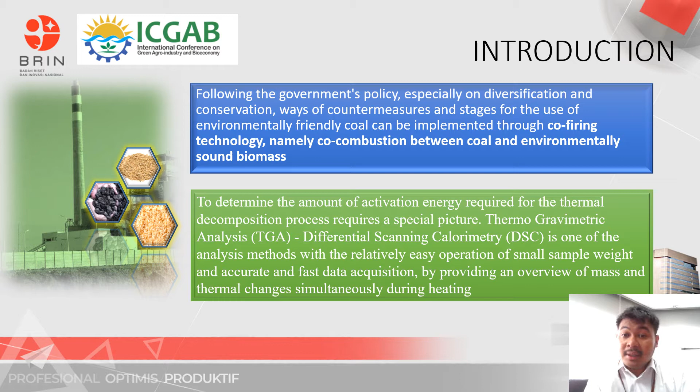So our research methods: the study aims to evaluate the possibility of the utilization of rice husk waste and sawdust for co-firing with coal in the boiler power plant with the capacity of 2 times 50 megawatts and develop recommendations to the government related to the process of utilization of biomass waste for co-firing. We have activities divided into the following stages.

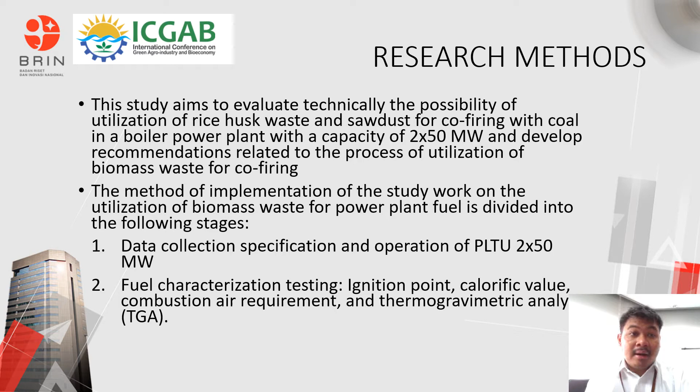First, data collection, specification, and operation of the coal-fired power plant, 2 times 50 megawatts, and second, fuel characterization testing, including ignition point, calorific value, combustion air requirement, and thermogravimetric analysis, or TGA. We conduct various parameters of the TGA profile, which can be obtained from several activities. We evaluate the initial combustion temperature, maximum peak temperature, final combustion temperature, maximum rate of weight loss against time, and also the start and end time of the oxidation reaction between carbon and oxygen.

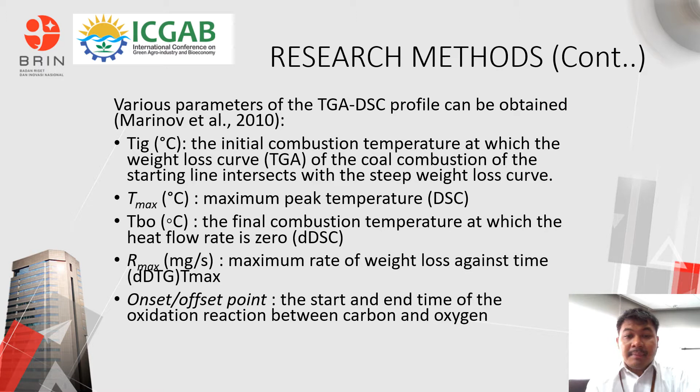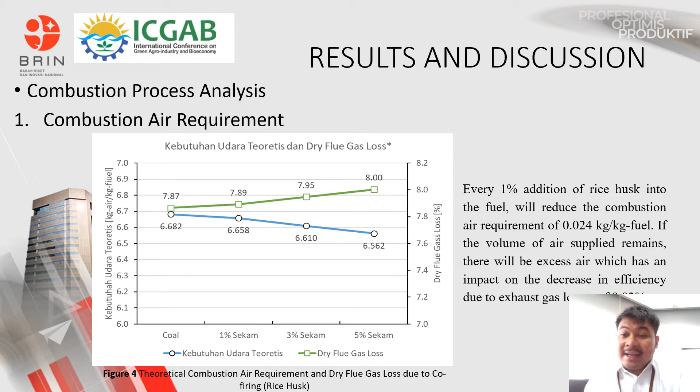As we see from this result and discussion part, for the combustion air requirement, every 1% addition of rice husk into the fuel will reduce the combustion air requirement by 0.024 kilogram per kilogram of fuel. If the volume of the air supply remains, there will be excess air which has an impact on the decrease in efficiency due to the exhaust gas losses.

As we see from the combustion air requirement in figure 6, the addition of 1% sawdust will reduce the need for combustion air by 0.006 kilograms per kilogram fuel for ironwood and 0.009 kilogram per kilogram fuel for teak. The increase in exhaust gas losses that occur when the volume of air supplied is not lowered is equal to 0.01 for every 1% addition of teak sawdust or ironwood sawdust.

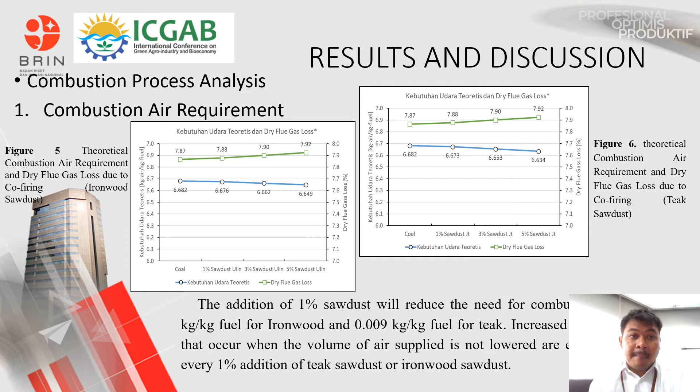Here we have the calorific value analysis from figure 8, figure 9, and figure 10. From the figures, it can be seen that the calorific value drops along with the mixing of biomass into coal. Every 1% mixing of rice husk into coal will reduce the calorific value by 19 kilocalories per kilogram, while mixing sawdust will reduce the heat value by 7.5 kilocalories per kilogram for each addition of 1% ironwood sawdust and 7.6 kilocalories per kilogram for each addition of 1% teak sawdust into the fuel.

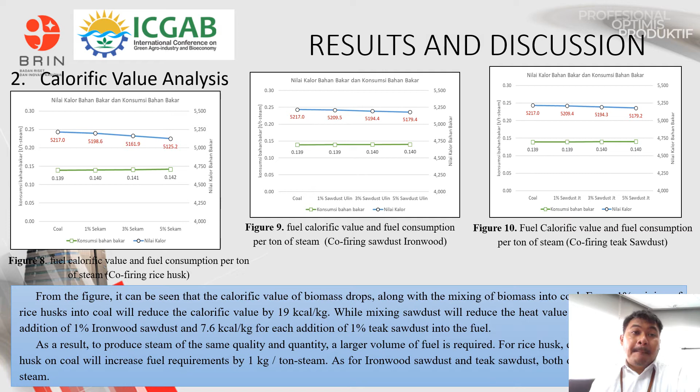As a result, to produce steam of the same quality and quantity, a larger volume of fuel is required. For example, the addition of 1% rice husk to coal will increase the fuel requirements by 1 kilogram per ton of steam. As for the ironwood sawdust and teak sawdust, both are 0.2 kilogram per ton of steam. We have the information on the ignition point here.

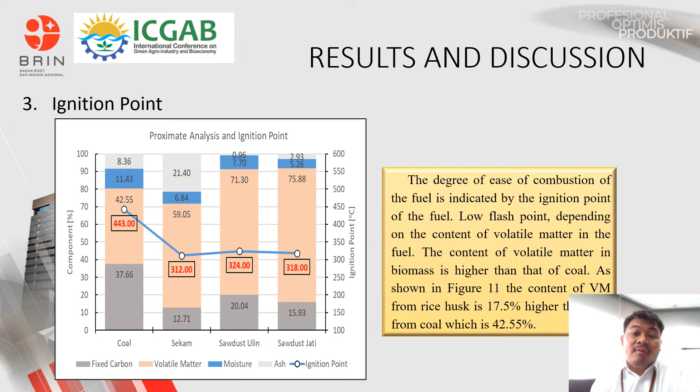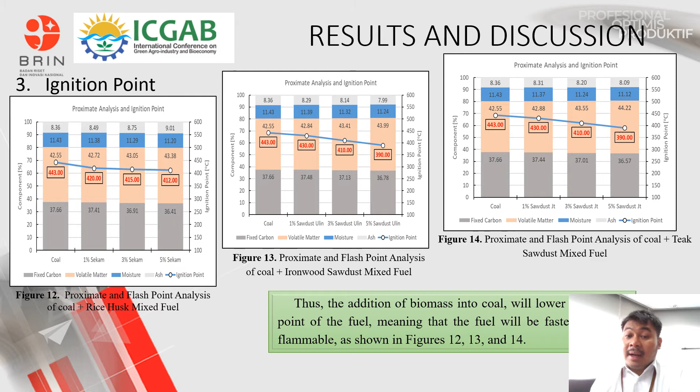We use the information from thermogravimetric analysis, or TGA, and the combustion characteristics to interpret the combustion profile of the TGA results. First, we analyze the first initiation temperature and the second initiation temperature, where the rate of weight loss increases due to the onset of char combustion. Also, the peak temperature, the maximum temperature reached due to the combustion of the materials at the maximum rate of weight loss. And lastly, we conduct the burnout temperature measurement, where the weight of the material becomes constant and the rate of heat generated is zero, which indicates the end of the combustion.

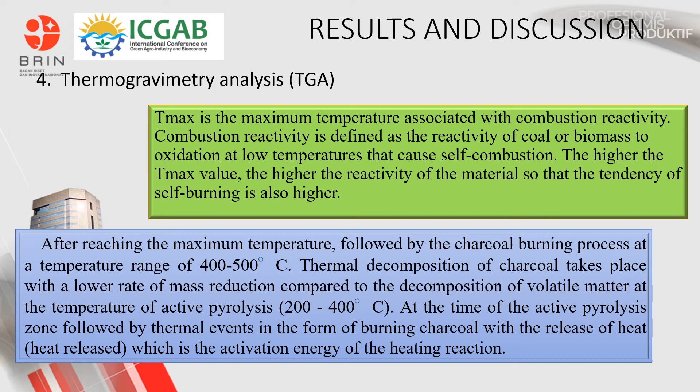Second, mixing biomass into coal will reduce the theoretical combustion air requirements, namely rice husk by 0.024 kg per kilogram of fuel, sawdust of ironwood by 0.003 kg per kilogram of fuel, and sawdust of teak by 0.009 kg per kilogram of fuel, for every 1% addition of the biomass. If the volume of air supply remains, there will be excess air, which has an impact on the decrease in efficiency due to exhaust gas losses of 0.02% for rice husk and 0.01% for ironwood sawdust and teak sawdust.

In terms of calorific value of fuel, every 1% mixing of rice husk into coal will reduce the calorific value by 19 kilocalories per kilogram, while mixing sawdust will reduce the calorific value by 7.5 kilocalories per kilogram for each addition of 1% ironwood sawdust and 7.6 kilocalories per kilogram for each addition of 1% teak sawdust into the fuel.